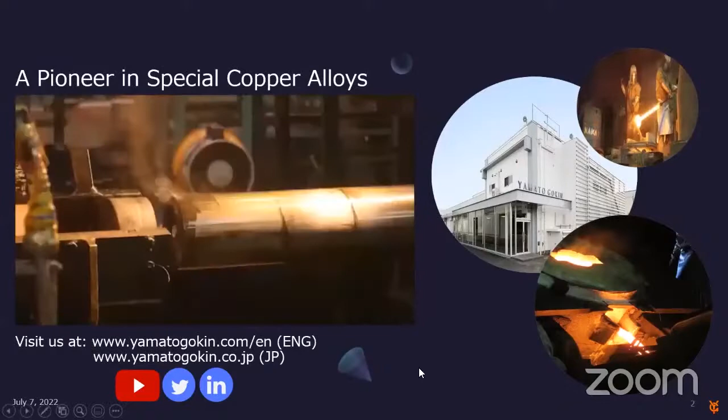Hello, everybody. We are here representing Yamato Gokin, a special copper alloy manufacturer. Our company is an SME with about 150 employees, and we have been making copper alloys for almost 70 years. My name is Lauren, and I work in Yamato Gokin's Quality Assurance Department.

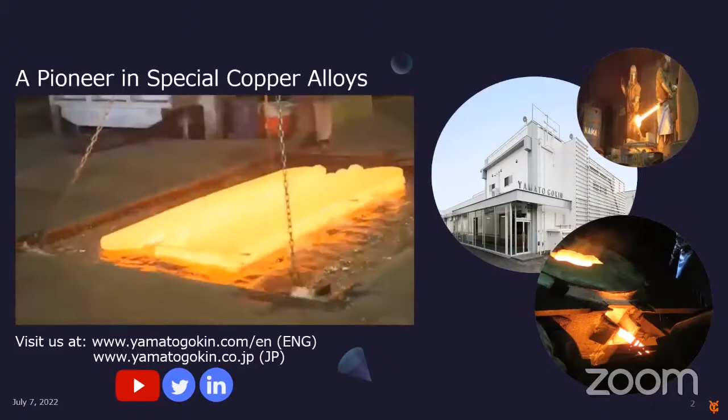So to speak briefly about the history of our company, we were founded in 1953, and since the beginning, we've specialized in special copper alloys. We make over 100 different grades of copper alloys. Our factory headquarters are in the town of Miyoshi in Saitama Prefecture, about an hour outside of Tokyo. And we have two factories, the Miyoshi Gokin plant in Miyoshi and the Asaka factory in the town of Asaka.

In terms of the types of material that we produce, we supply raw and semi-finished materials, and we can do everything from casting to machining, so every stage of the manufacturing process. We develop individual new materials for new applications, in addition to established materials according to existing specifications.

And in terms of the characteristics that distinguish our company, in addition to our experience with copper alloys and our long history making them, and our start to finish production process, which means that we can customize every step of the manufacturing because it happens in-house, we also have an R&D department that is continually working to both improve the products that we already make and to find new products and new applications and invent new materials to meet our customers' needs.

We also believe as a company in having well-rounded employees who know everything about everything. So there's frequent departmental rotation so that the people who are making our material and selling our material get firsthand experience in every stage of the process. We also have external lecturers come in to do study lectures at the company.

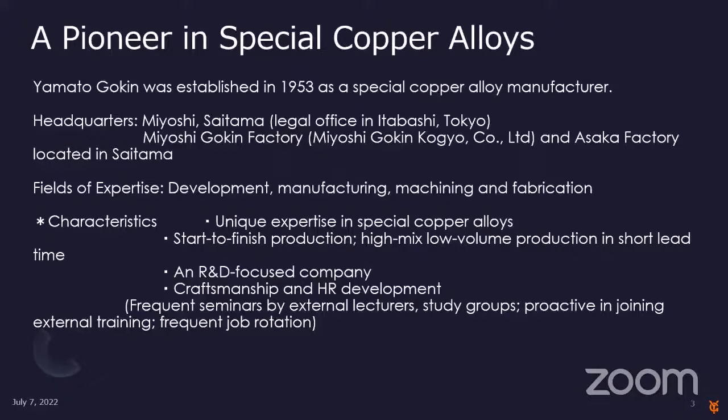To speak a little bit about the equipment that we have and our technology. In terms of melting and casting, we cast the ingots from the raw materials here at our company. We have high frequency induction furnaces, as well as gas furnace and middle frequency induction furnaces of varying sizes. So according to the scope of the order, we can use the appropriate furnace and we can customize the casting method and the chemical composition in order to meet our customers' needs.

We also have both forging and extrusion equipment on site. We have one 1500 ton forging press, 3 air hammers for open die forging. We also have a 2700 ton extrusion press. And by cold and hot working the material, we are able to homogenize the grain structure and increase the properties of the material.

Also, we have heat treatment furnaces on site. We have both gas and electrical furnaces. And by using the appropriate heat treatment on the appropriate material, we are able to control the microstructure of the material and thereby adjust the properties for the application, improving electrical conductivity or elongation or strength, depending on what it needs to be used for.

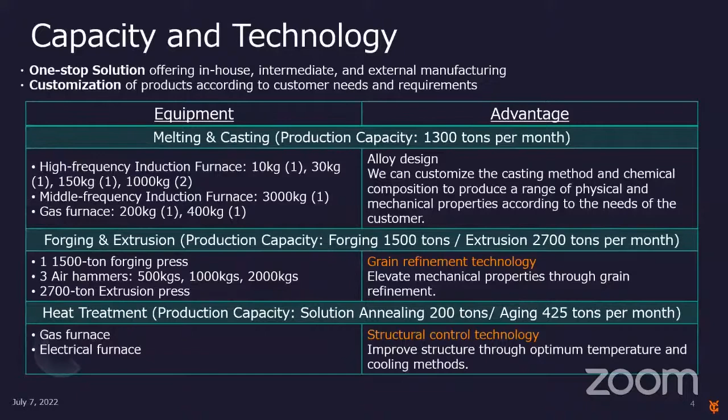And our integrated manufacturing system, where every stage of the manufacturing happens in-house, allows us to deliver materials quickly as needed because everything happens in one place. It doesn't need to be transported from one place to another. And also it allows us flexibility when it comes to adjusting the manufacturing parameters.

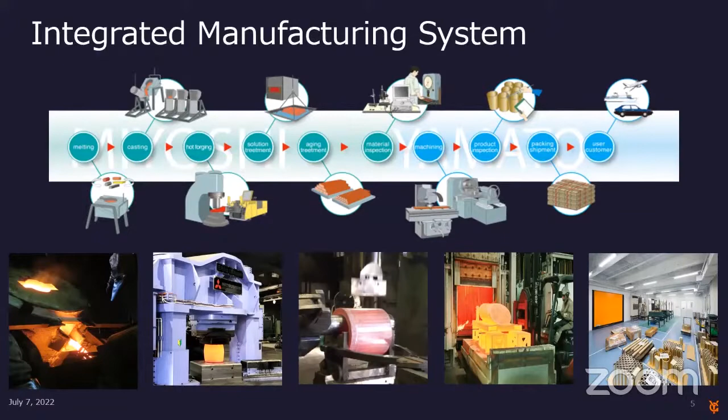As a company, we specialize in high mix, low volume manufacturing. So instead of mass producing only a few types of material, we make small quantities of many different types of material, different grades of alloys, and then also different sizes, different shapes. And one of the things that allows us to do that is the fact that we control every step in the manufacturing process.

One of the fields that we are currently working in is the fusion energy sector, and particularly the ITER project, which I am sure you are familiar with. To explain a little bit more about our contributions to the ITER project, there are several different countries that are working to contribute material to the ITER reactor. And we are currently supplying material to 3 components of the divertor: first, the inner vertical target, the outer vertical target, and then also the first wall blanket. I'll talk a little bit more about those in the following slides.

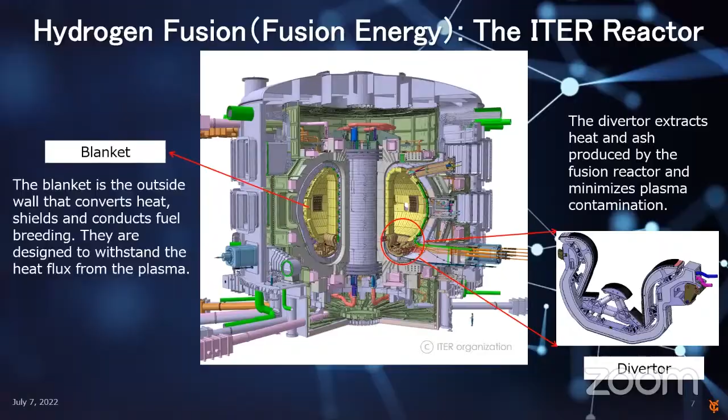So in terms of the outer vertical target, this is the component that is being supplied by Japan for the project. In the outer vertical target, the cassettes, there are monoblocks that have an inlay of oxygen-free copper. Within those monoblocks, there are copper chrome zirconium tubes, and these are what is being supplied by our company. And within the tube, there is also oxygen-free copper twisted tape.

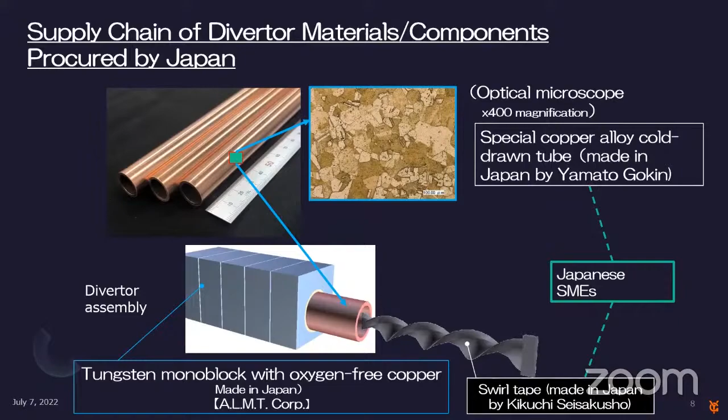So as you can see, the material that's in these outer vertical targets is contributed by a mix of large companies such as Allied Material and SMEs such as ourselves. Our history with this project started in 2006 when, thanks to an introduction from Mitsubishi Materials, we were contacted by QST, who invited us to try manufacturing these cooling tubes for the divertor.

But the nature of the tubes is that because they are subjected to a very high temperature heat treatment while they're in the reactor, they need to maintain a very fine microstructure and high mechanical properties even after being subjected to this heat and pressure. And our first manufacturing trials were initially not successful, and we saw some abnormal grain growth in the material. But our R&D team worked together with our manufacturing team to fine-tune the process and adjust the parameters. And eventually we were able to make material that successfully met the requirements even after the necessary heat treatment.

And in 2016, the test divertor that used our special alloy tubes was the first in the world to pass qualification trials. In the following years, we patented the manufacturing process of these tubes, both within Japan, and also we submitted patents that were approved in the United States, Russia, South Korea, China, and the EU. Starting last year, we've been supplying tubes for this application for the full-scale supply. So that is roughly 500 tubes for the next 5 years that we will be supplying for this project.

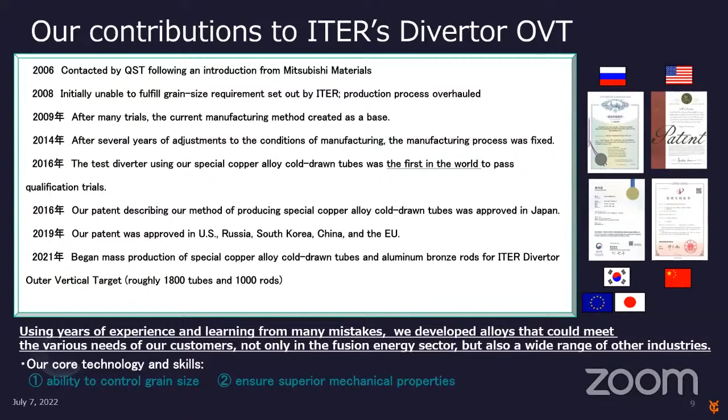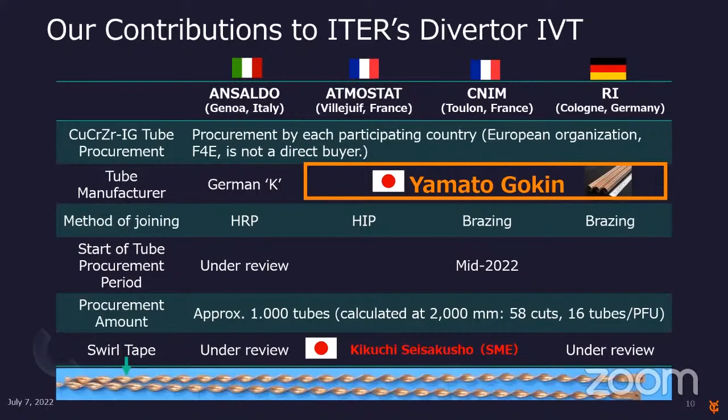Another area where we are supplying these cooling tubes is the inner vertical target, which is being manufactured by the EU. In the EU, there are currently 4 companies that are bidding to build these cassettes, and they have their own freedom to go with whichever raw material suppliers they would like to use. And currently, 3 of the 4 companies that are in competition for these orders are committed to procuring 100% of their material from us.

Lastly, we are supplying material to the ITER first wall panel. Specifically, there's a layer of copper chrome zirconium in the panel itself. And overall, there is 460 tons of this copper alloy that will be used in the panels that make up the blanket. And currently, roughly half of that material is planned to be sourced from the EU.

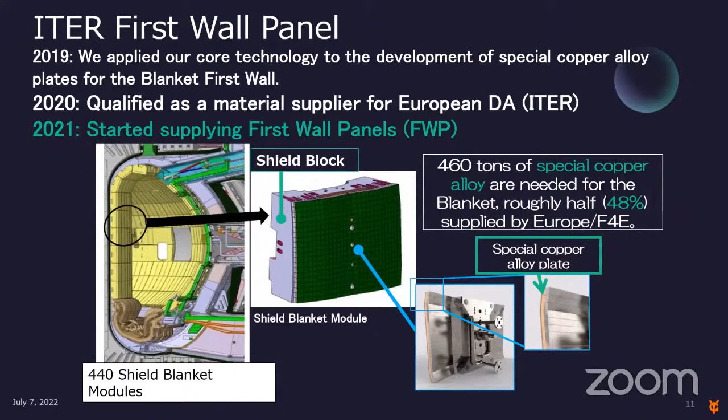And in 2019, we got a contract with the EU organization Fusion for Energy to produce a prototype plate for this application. We were able to successfully manufacture material that met the requirements, and this allowed us to be eligible for bidding for the full-scale contract. In 2020 we were qualified as a supplier, and in 2021, we got our first order making these copper chrome zirconium plates for the actual application in the actual reactor. So we have been making that material last year and this year. So that's a brief history of our company and our work in the fusion energy sector.